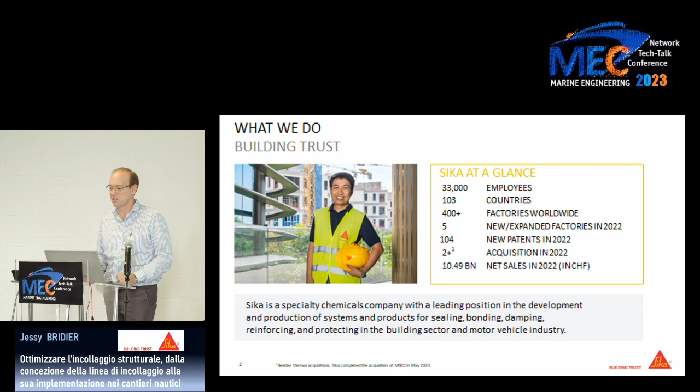So just as a reminder, very quickly, Sika is quite a big international company. We are 33,000 people. We have factories everywhere, but what is important to say is that we are big, but the spirit is to be close to our customer. This is why in each country we have a team to take care of you, and even in a lot of countries we have a specific marine team. So you have my colleague here, my other colleagues which are here, that are really specialized to try to speak the same language as you. So I think that's the key message that we would like to say here.

Second point I just wanted to mention about Sika is that we are really doing very strong effort to be innovative and have new products to support our customers. So that's really our DNA, to work and to create new things. So for example, last year we had 104 patents in a lot of different areas. And in particular, in structural bonding, we are really pushing a lot in this area because we believe that there are a lot of possibilities for the industry to do better things. So this is, I would say, the introduction about Sika.

And now I would like to share with you one kind of application Sika has been developing for something like 15 years now, related to structural bonding in leisure boats, in composite boats. So this is a topic that we started, I think, roughly 15 years ago, and that is on sale since roughly 10, 12 years in various countries like France, Germany, UK, Nordics, and USA, and a bit in Italy, but that we are now pushing.

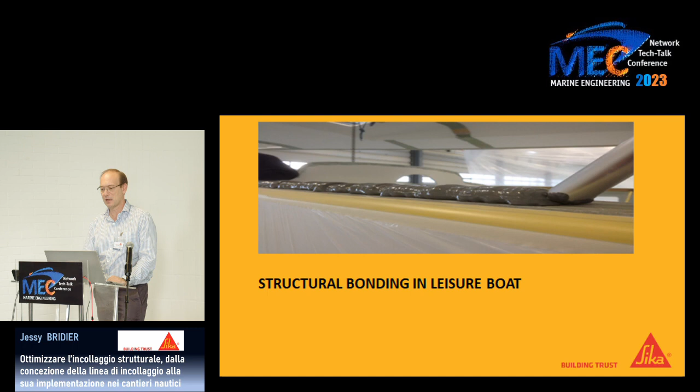So what do I speak about when I say structural bonding in leisure boats? That's quite simple. We are targeting and developing three main applications. The first one is stringer bonding, so this stiffener which is at the bottom of a hull with the purpose to give some stiffness to the structure, and which is quite often bonded or over-laminated. So just here a photo of the kind of assembly our customers are doing with our solution.

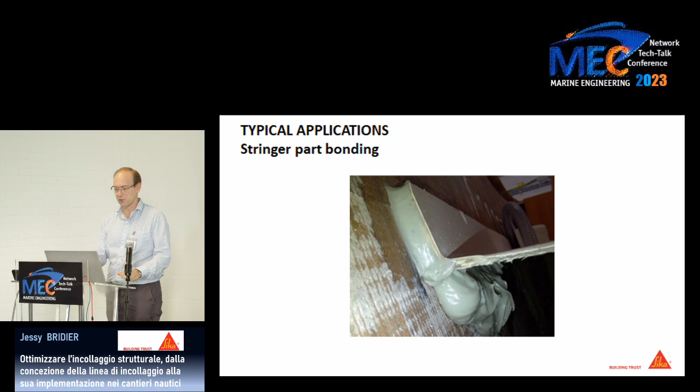The second typical application I am touching today is related to the bulkhead application, so bonding of the bulkhead to the hull or to the deck. And that's also something that you can see here on these two photos taken at another customer, of joining this bulkhead with the hull.

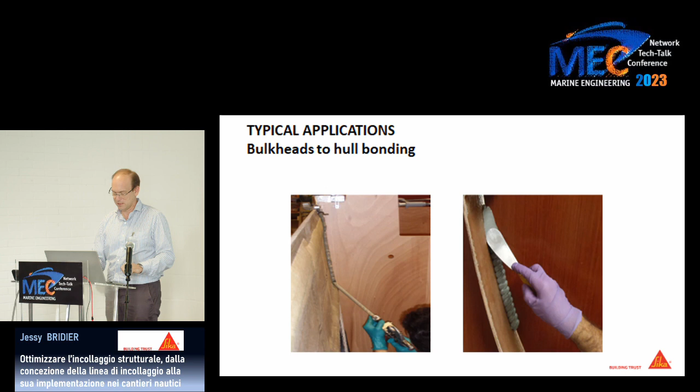And last but not least, the third point that I am touching today is related to what I would say is closing the box, meaning connecting the deck to the hull with a structural adhesive. So this is something which can be done all around the hull, which is here, but also on the bulkhead, where you can see this U which is also bonded. So this is my topic today, to share with you what we are doing with that, or how we are working with our customers on this topic.

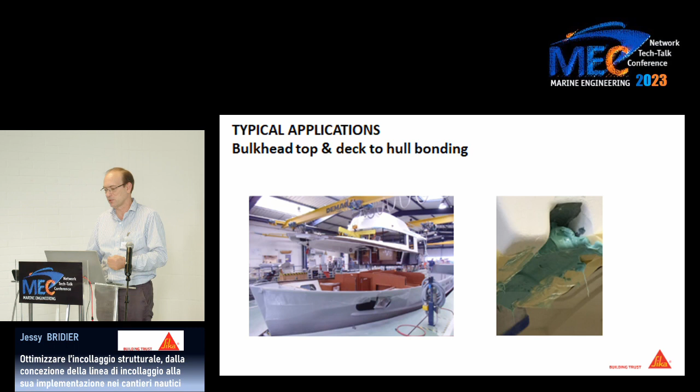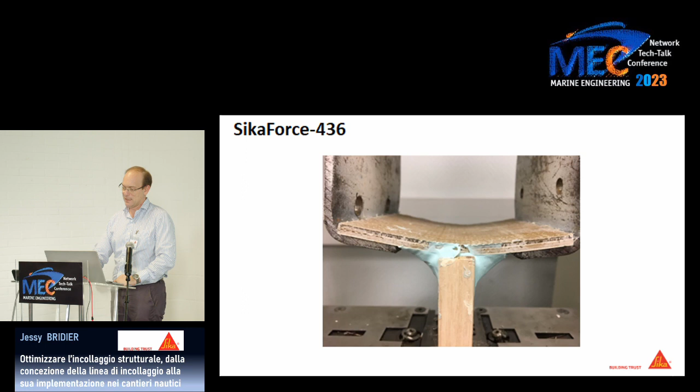So to do this connection, Sika is proposing a system which is called SikaForce-436. So this is a product which is oriented for structural bonding. And this photo is already showing you an idea, so that's a strong bending you have that the adhesive is capable to absorb. And the idea is that we are providing a product, and I guess this is what the market wants, which is stronger than the composite. So for example, here you have an example of a lab test that we are doing.

Can we have a summary? Only a small summary, every 2-3 slides. But absolutely, non c'è tanto tempo. You want to translate? No, because up to you. That's okay for you guys? Because at the end, that's the point. That's okay. If you want, we can do a break and a few words in Italian just after a few slides, Frank, if you are fine with that. Much better. Yeah.

So the point here is we will do a bonding, and with this bonding, when you pull, you have a small displacement of the two parts which are bonded. But what we are achieving here is related to the fact that we are proposing an adhesive which is stronger than the composite. So the point is that we are not able to tell you how to design your boat. You are the professionals of that. But what we want to do is provide you a connection, an adhesive between the two materials, where we are sure that the material used will break before the adhesive. So that's the point. We can say, okay, we pull out the fiber of your composite, meaning that the weak point is the bonded material and not the adhesive itself.

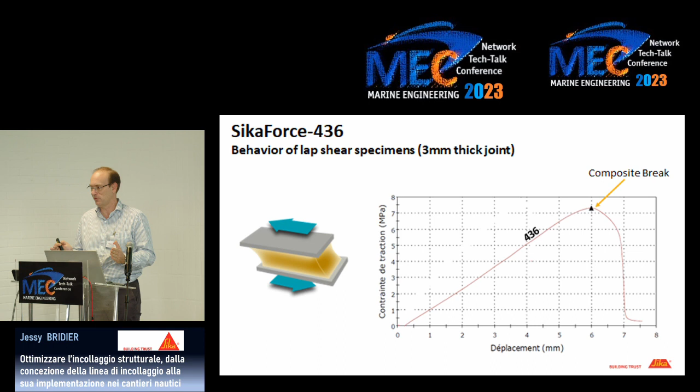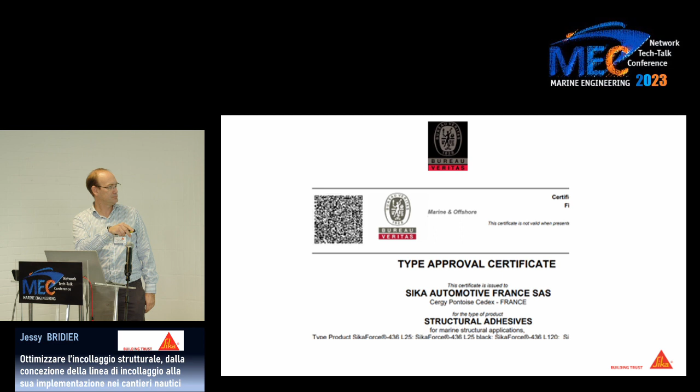And that's really the strong point, because we are a Swiss company, we like things which are totally safe, and this is why we are going in this direction. And to prove that, we have type approval from Bureau Veritas, showing that the product is for structural marine applications, and also RINA approval, because we are in Italy, so this is the minimum we can do for you, which is also here.

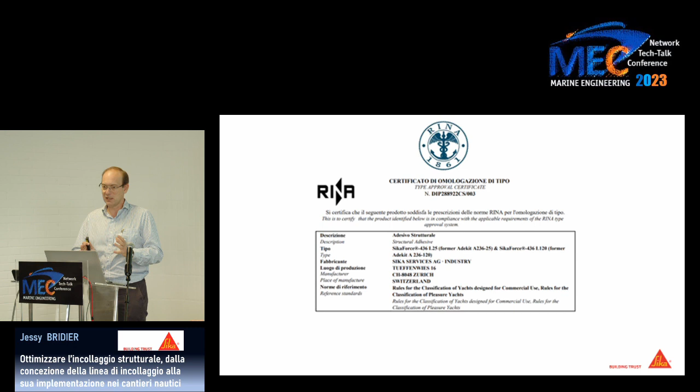So, key message is that we have a connection which is stronger than the material which is bonded, and now that this application functionality is done, the point is to tell you why we think it's a good solution. Because you know how to do boats, your boats are on the sea, on the lake for decades. So here we can tell you this has been working for a decade.

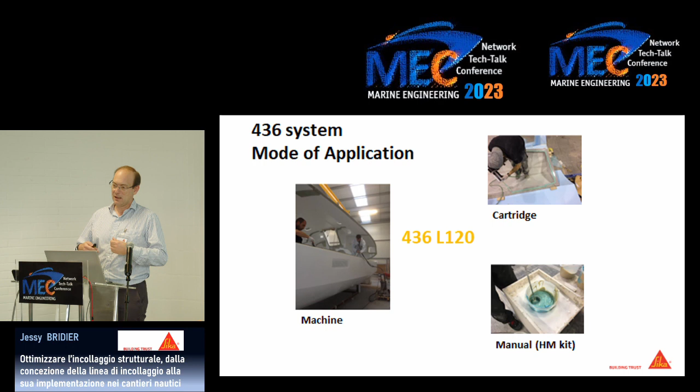And why we think it's offering quite a good solution for the market is that this product can be used in a lot of ways: cartridges, manual mixing or dosing machine, and it does not drastically change the way you use other technologies. But what we have at the end is a product which is stronger than the composite. We always have a fiber pull-out. We have an easy surface treatment, no sanding, sometimes direct bonding.

Extremely important, no exothermy, no shrinkage. So when you use this product, it is not warming, it is not pulling out your part. So the shape you have before the bonding is the shape you have after the bonding. And I think that's something which is quite important. And last but not least, it's very easy to...

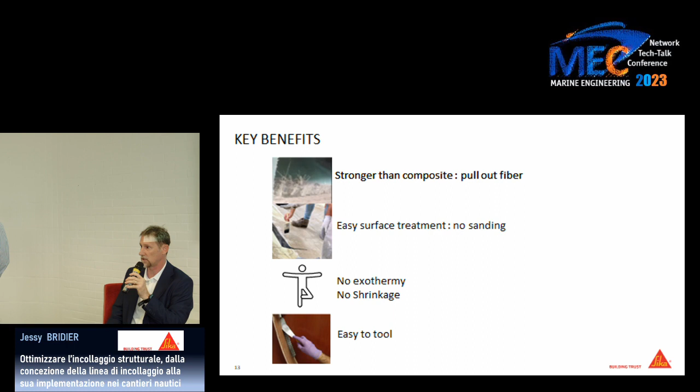Is it required to also add mechanical fastening to the glue? Not at all. Here we are speaking about structural bonding. The glue is doing the job. That's the point. And at the end...

Sorry, please? Italian, up to you.

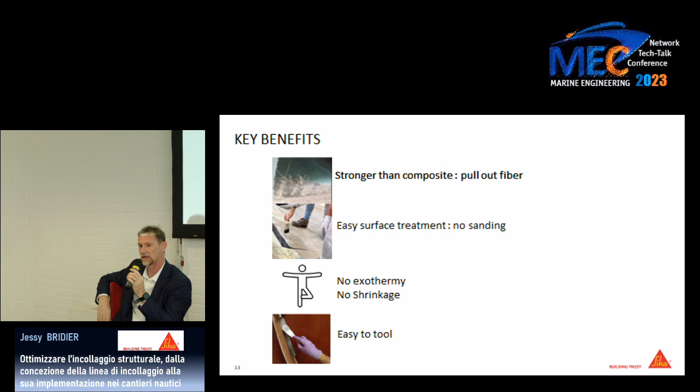Two questions. One is if there is an optimal thickness for the bonding. The second, if there is the need to add a primer on the surface.

So regarding the joint dimension, the product is designed to have a lot of versatility. Usually we suggest to our customers to be around 6 millimeters of thickness. But the product can accept going up to 20-25 millimeters. From my point of view, it's fine, but it is not required, it's more volume of adhesive which is not needed. But sometimes parts move, so it could happen that we design at 6 millimeters, 80% of the joints are at 6, and at the end some are at 20. This can be accepted.

And if you come back to this slide, you have it. 6 millimeters is the minimum? No, it's not a minimum. The minimum, if you want to go in this direction, I would say don't go below 0.2 millimeter. Which in this industry should not be the case. You always have gaps between parts. Usually something around 6 is a good compromise between all the properties.

Regarding your question on surface preparation, it's part of our process to work with our customer to define exactly what has to be done. Because there are a lot of different resins. If you are manufacturing by hand lamination, by infusion, if you're on the gel coat, on the B side, it could be slightly different. So in some cases, we have direct bonding, or what we like to suggest is, before bonding, you have a peel ply, you remove the peel ply, and you bond.

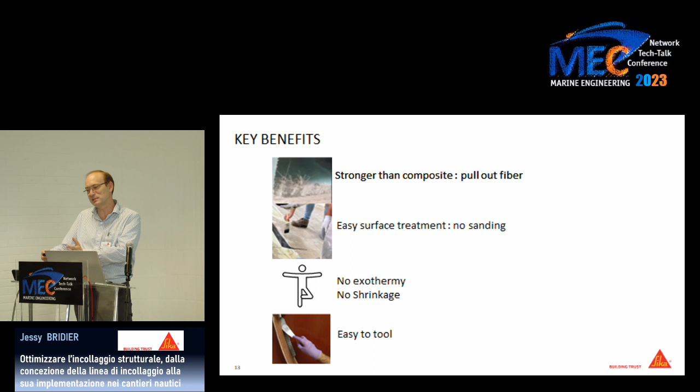Why? Because with a peel ply, we are sure that surfaces are clean. You must have a clean surface. So this is what we suggest, a peel ply, to be sure of the clean aspect of the surface. And for difficult situations, we have a primer that can be applied by brush, securing your aspect.

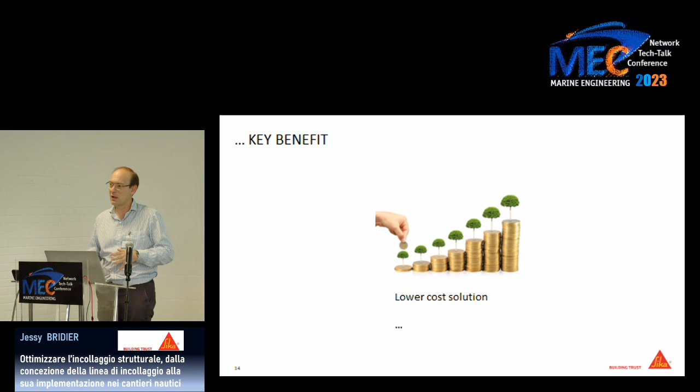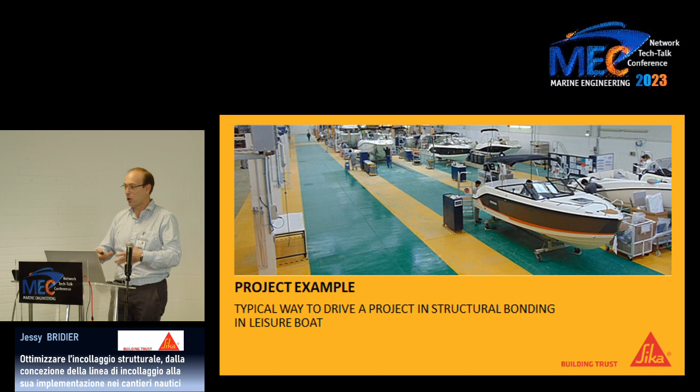But this is what I'm presenting just now, after how we work to implement the proper solution. So here I am sharing with you a project that we had last year with a company named Brunswick that authorized us to communicate today with you. We had a partnership with them, so we worked with the US headquarters to do exactly what you were asking: how to proceed, and step by step implement the solution.

So what was the original situation? Brunswick, we started to discuss with them last year. It's a big international company with the headquarters located near Chicago in the USA. It's a $6 billion turnover company with 19,000 employees, so more or less as big as Sika. And they are manufacturing a lot of boats and operate in a very traditional way, using over-lamination to connect all the parts together. So that's the initial situation, with a very traditional way of working.

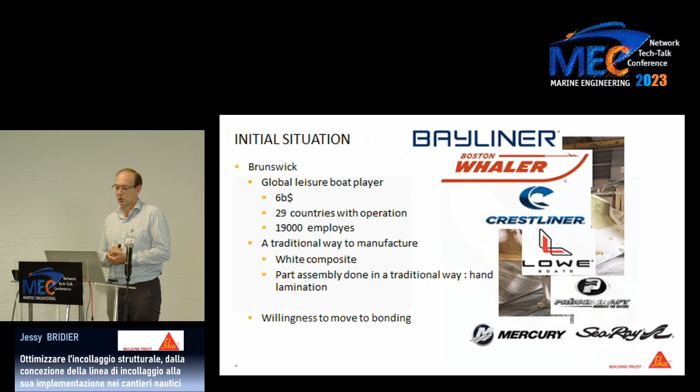So the original situation was, okay, there is a specific boat. These drawings are coming from Brunswick. They are sharing that with you, with over-lamination everywhere. And the question mark was, how to be more efficient in production, how to save time to manufacture parts. And what we were suggesting is to move from this over-lamination to bonding. But this is not something you do just like that, change everything, here's the glue, do your job. No, this is not the way we are working in Sika for this topic.

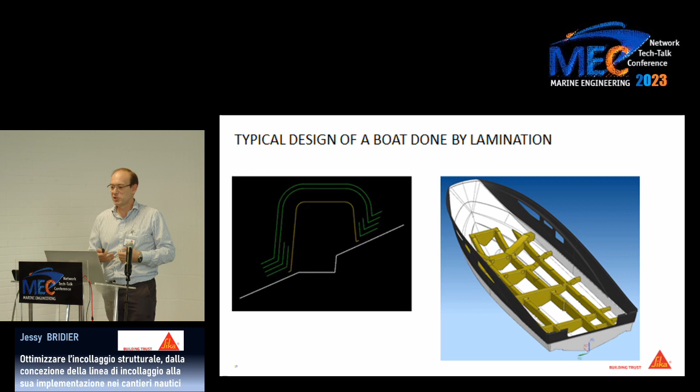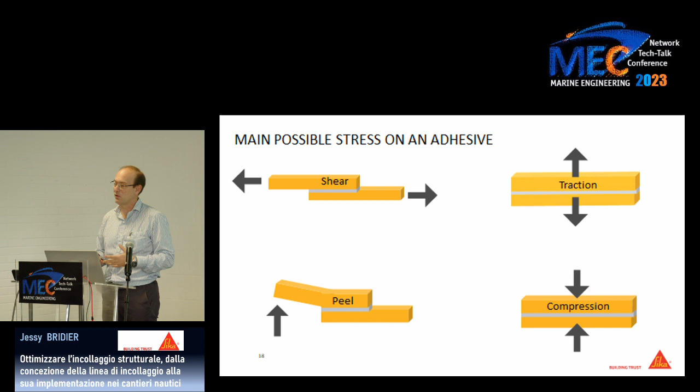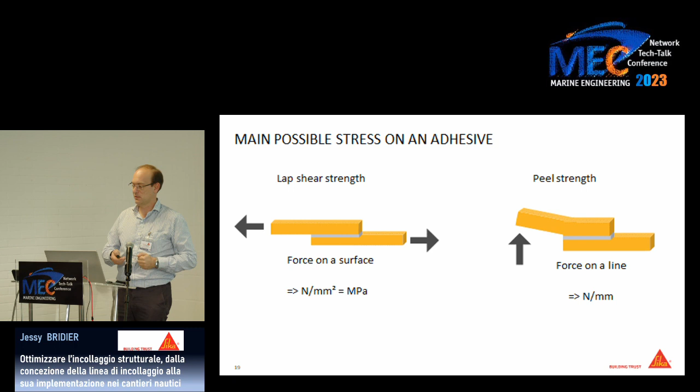So we exchanged with the R&D located in the USA to share with them what we think is good in terms of design for bonding. So that's quite simple. We can segment the part into different kinds of mechanical stress, and also underline that in some cases you have a force working on a line, and it's better to have a force on the surface. Or if you have peel, you need a bit of width of the product to absorb the peel.

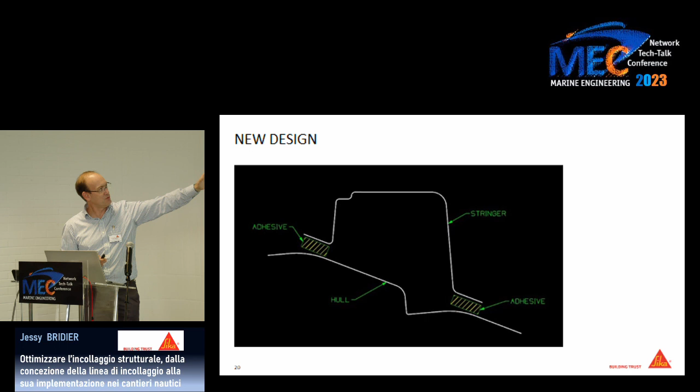So this is why Brunswick was designing the connection in another way. We were moving from this situation, and thanks to the exchange we had with them, they transformed it into this, and in the end obtained a design which is slightly different for the new boat they have, but which is compatible with bonding. So this job was done for the new model so that we are moving from a situation designed for one assembly to another one. So that was the job done, first of all, with the engineers to have a proper design.

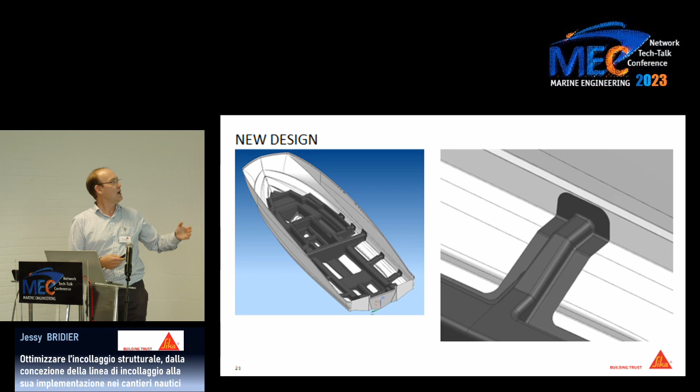Next step was, okay, everything is nice on the computer. How can we work together to make it happen in the factory? And that's also something where we need to pay attention and support our customer, because once the design matches the possibility to bond, we exchange with them on how to implement. And this is what we were discussing 5 minutes ago. What is important is how they manufacture their composite and what they want. Do they want something very slow because they have manual work, so they need a slow adhesive, or do they want to go super fast to do the connection?

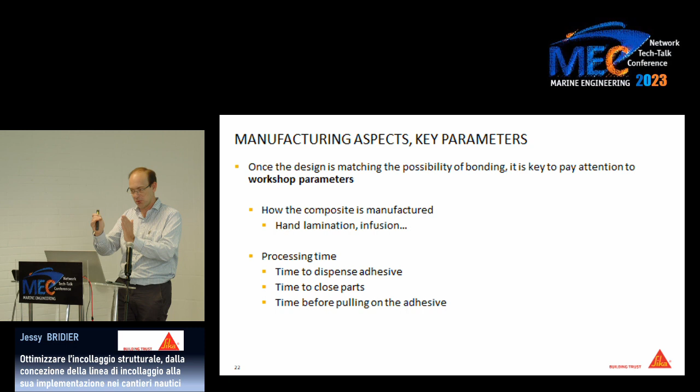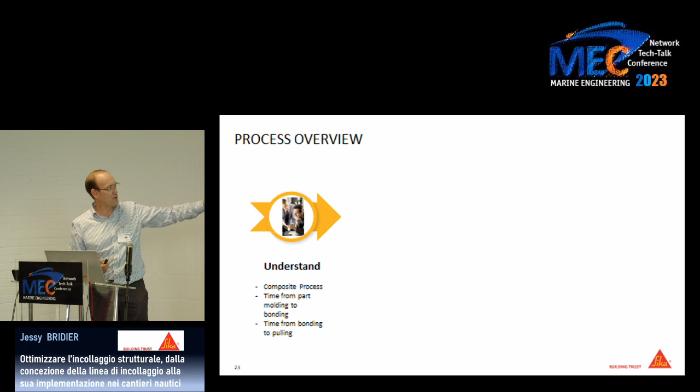So even if you have a perfect adhesive, if it is not matching the process you have in your factory, that's just useless. And this is why we also spend time, it's not rocket science, just a methodology to apply, to first understand what composite process they have in their factory, what is the time from molding to bonding, and the time from bonding to pulling out the part. That was key.

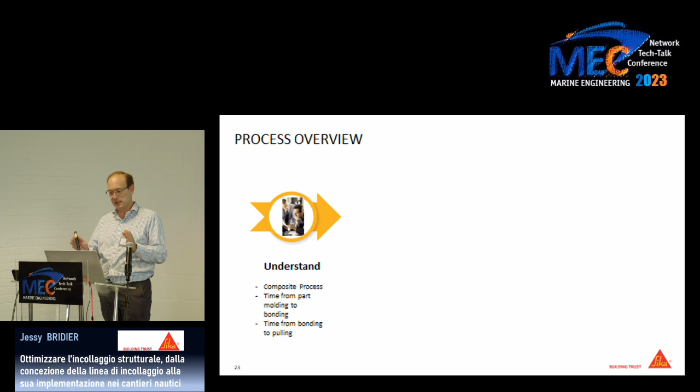So this was done in Portugal, because we defined the concept in the USA. All the concept and the design of the boat was done in the USA, and the first factory to implement it was in Portugal. So the Sika team went to Portugal, spoke with the production manager: what do you want to do, how do you want to do it, and okay, it's clear, now we can do a bit of homework. Because at this point, according to us, the last thing to do is just sell the glue. And quite often we say, no, we are not selling at this point, we would like to secure a bit more to be sure that everything matches your expectations.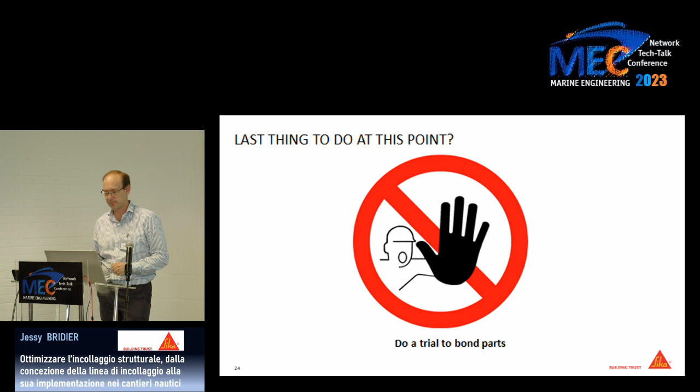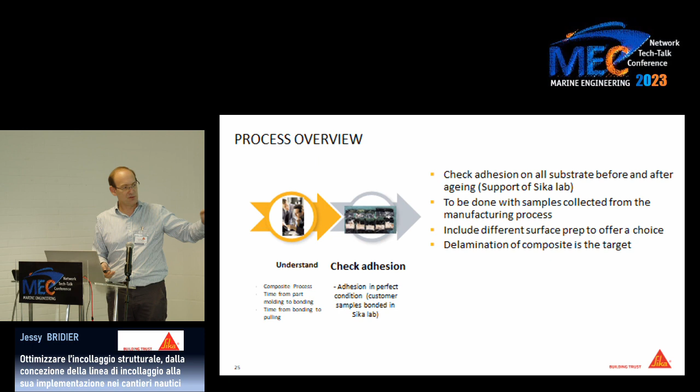So at this point, we just check the adhesion. That's a simple job that Sika does for its customers. Take a bit of the customer's material and prove that what we were saying, that we will achieve fiber pull-out, an adhesive stronger than the composite, is true. So this is what was done as a first stage inside the lab of Sika. So here, green light, we can go to the next step. What was the next step?

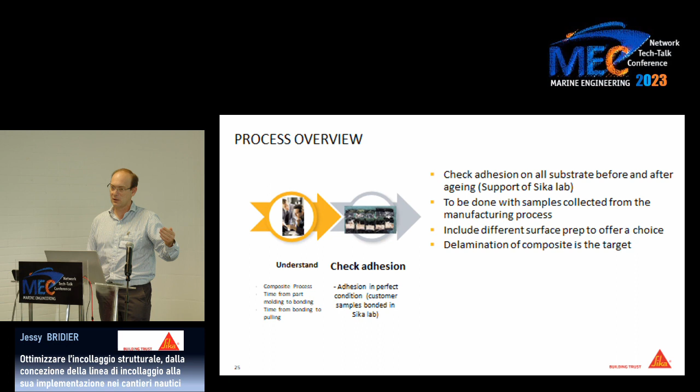It was to check that what we saw in the Sika lab is still true when we bond in the factory. Because here, what the customer wanted is to mold the part and be able to bond just after the molding, or be able to bond 5 days after. And you know, like me, that a composite which is fresh or old is not exactly the same. And this is why we were at the customer. He was manufacturing some samples in front of us, and we checked that.

So that's the sample. And we checked, so you can see the bonding after 75 minutes, 90 minutes, 2 hours, 4 hours, that everything is working. So that's the job of Sika, to say, Mr. Customer, Mr. Brunswick, when you manufacture your part, if you bond after 1 hour, 3 hours, or 1 week, you have still good results because we made the test and we are still stronger than the composite.

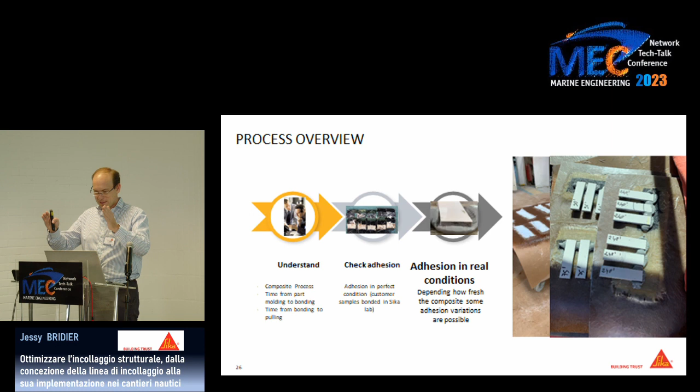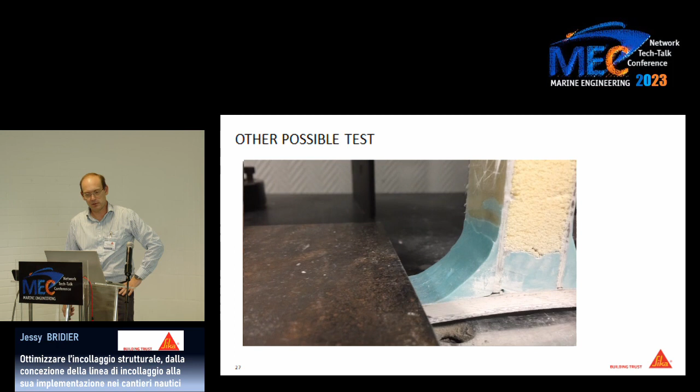So everything is starting from here, to say, okay, we understand what you are doing, we understand what are your needs. Sometimes you bond very quickly, sometimes you bond after a long time. That's the process that is working all the time. And just as a matter of example, that's also a test we are doing in our lab. For example, typical application, just to prove that we are breaking the fiber of the composite and not the adhesive or something else.

So that was, I think, very important to establish this, because there is a concept, there is a design on a computer, but this is not all the job. The job is to implement in a real factory to be sure that it is working. And adhesive, nobody is specialist of adhesive in our customer. This is our job to support you in order that we put step by step, and at the end, that's working, you can run, we can deliver, no problem behind.

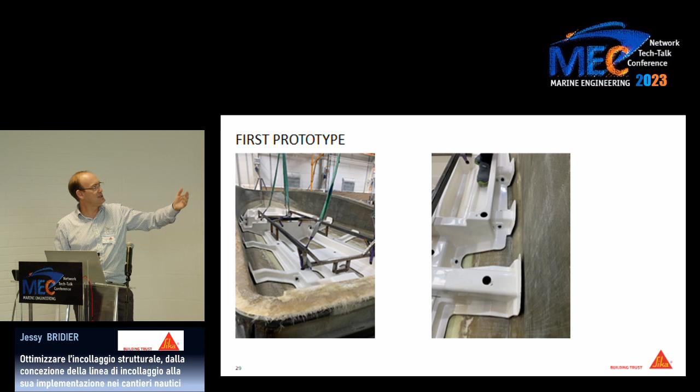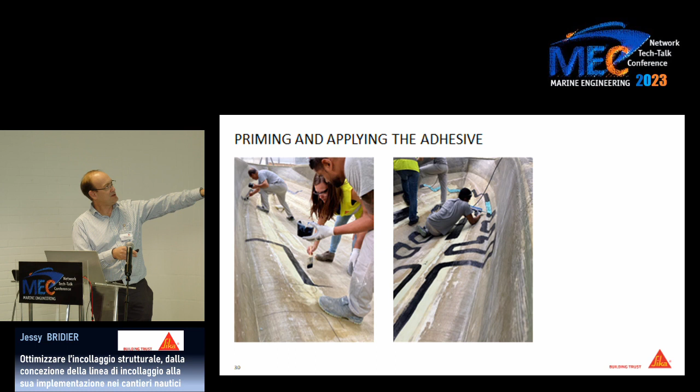So behind that, it was the first prototype. As you can see, the first original concept was to be at 6 millimeters, but some areas are more at this gap. But this is part of this kind of parts. You cannot be sure. So this is why there is a nominal recommendation, but we can be flexible behind. In this case, the securing of the product was done with application of a primer, which is very easy by a brush. The first prototype was done with cartridges. I will come back on the industrialization later on.

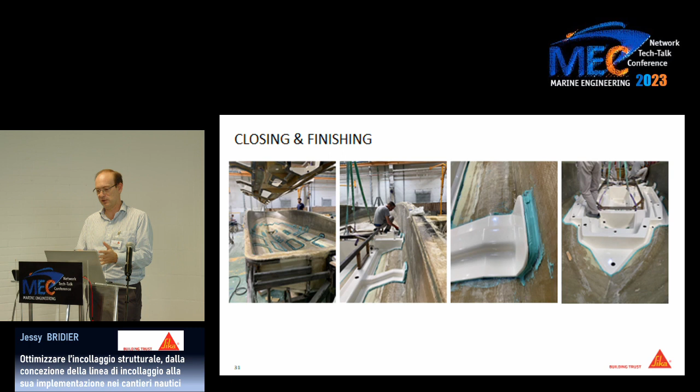And this is what was achieved step by step. So the glue is applied at the right place, and there is behind finishing of this part. First prototype run quite well. Customer made all the tests he has to do on it, put it on the sea, try to break it. So at this stage, we say what? We have a good concept. We know how to implement in the factory for a first boat. And now we need to support you in order to have an efficient process that's saving you time and saving you money. Because the full story is spending less money.

The customer wants to go fast, and this is what we are offering. We are offering a solution which is working. This is the minimum we can do. But we want to be sure our customers are saving money or making money thanks to us. And for that, there is a next step of industrialization, means how to dispense the adhesive in an efficient way with as few people as possible and as fast as possible.

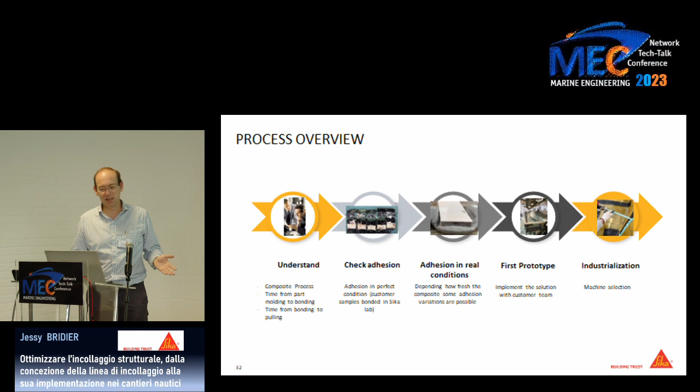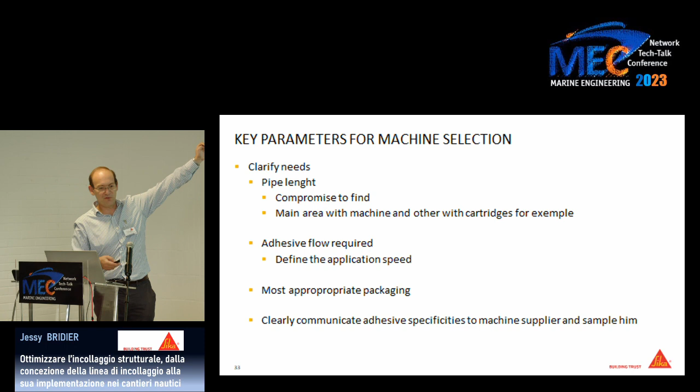So here again, let's speak with the production manager and understand how to work. And the idea is to say, okay, a small dosing machine is a good solution. So, Mr. Customer, what is important is to define which length of pipe you want in your machine. How do you want to use the machine? Is it on a static point or do you want to move it? And which flow do you expect? That can look obvious, but if you don't put that on paper at the beginning and just ask for a machine, maybe it will not match your expectation behind.

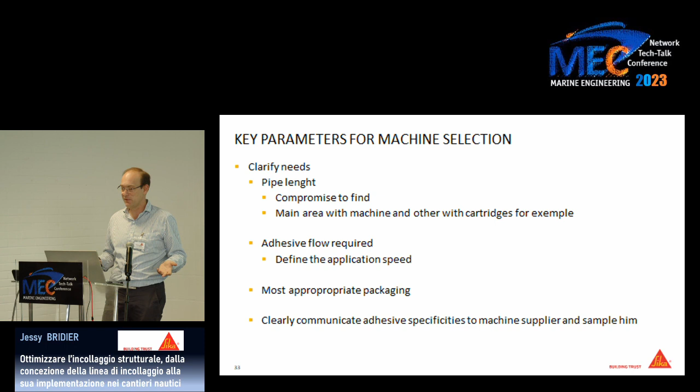And so this is where Sika can support, say, okay, in our experience, what is important for you is the length of the pipe and the flow you want. And it will drive the kind of machine you have and the supplier you can use. And of course, the packaging you will have. So we are supporting our customer to define key parameters to transfer to the machine supplier. And the machine behind can be very different. Here you have one kind of machine, big drums with a station. Here you have 80 meters of pipe behind to apply the product in a lot of places and to feed smaller machines behind. So that's the top level of the dosing machine.

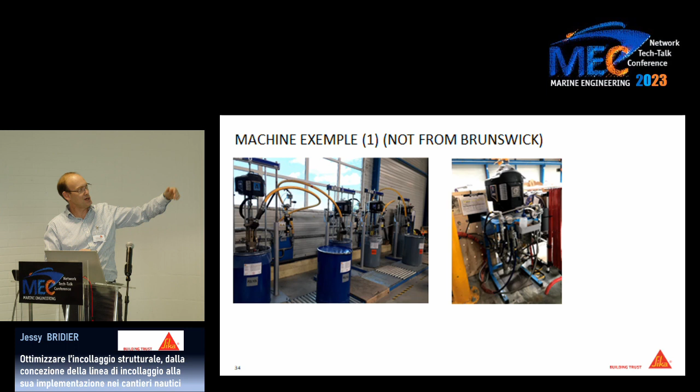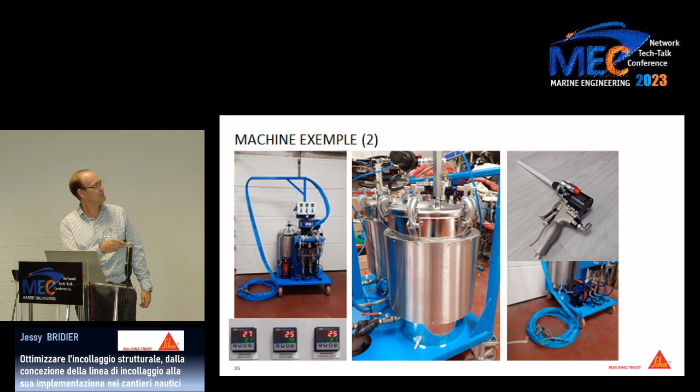But sometimes, and this is what was done for Brunswick, a more simple machine is possible. So this is 2 pressurized tanks. You fill the machine with the product just by hand, and you have a machine which is ready to use, and you dispense with a very simple gun. So this is what you can see here. The machine is behind here. You have a pipe, and at the end of the pipe, you have a gun, which is helping to dispense the product at the right speed. So this is one of the first tests. Now we are going 2 times faster than that. But this application is really much faster than what was done manually before for the hand lamination.

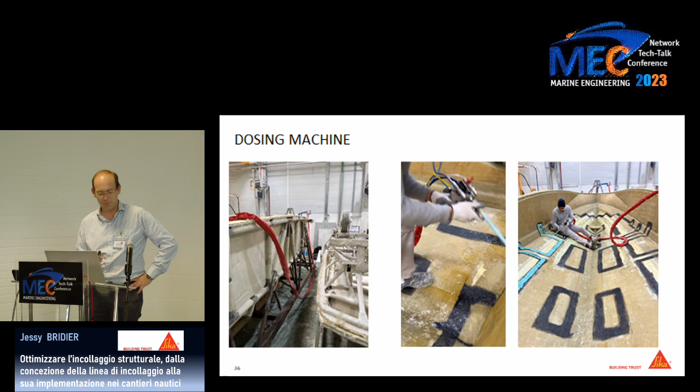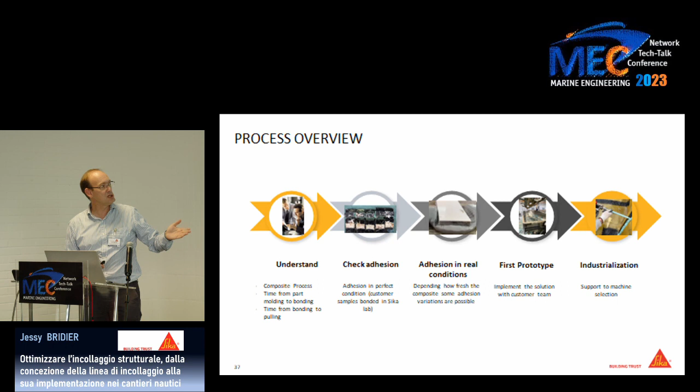And so that's the full process we are proposing to our customer to achieve at the end. That's the boat that I was showing you. This is this one that you can purchase if you want. So this is what we wanted to share with you. The spirit of the product that we are proposing, stronger than the composite.

The fact that it's very easy processing and not creating any exothermy shrinkage behind, but also all the support that we are providing to start from the concept to a production line, with something we can share our know-how with new knowledge, and that's what we want to do. So that's what I wanted to present.

I think I am in the timing that I was given by our nice organizer. And now we are pleased to answer your questions and comments.